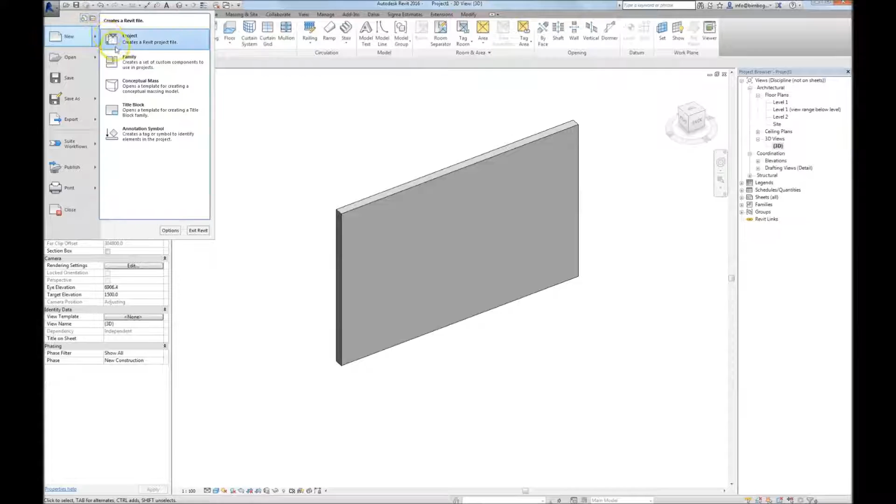I'll start by creating a new family from scratch. Among this list of family template files, I choose metric generic model wall-based, because I would like to have this light box as a wall-based family.

The environment in the project browser is almost like what we know from a project. We have a 3D view, elevation views, and floor plans, exactly like we know it from a building project.

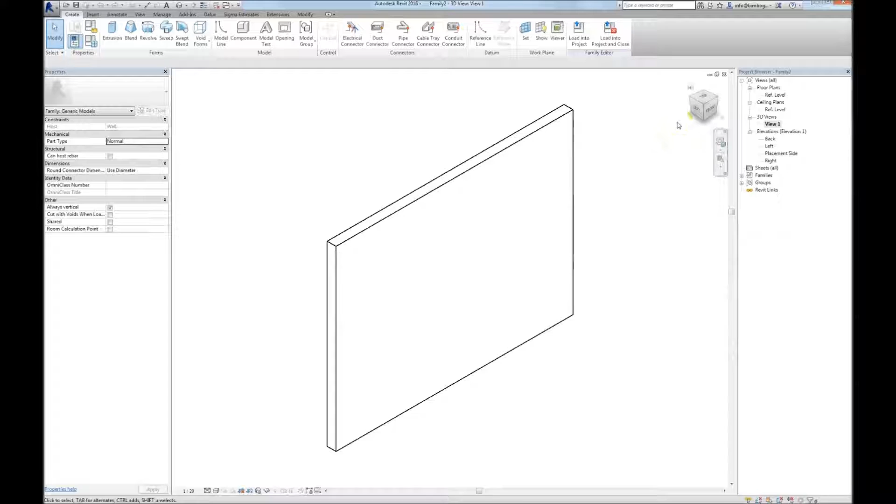So back to the floor plan, note that we have a placement site, and this is where we're going to create the light box. First of all, I'll create some reference planes.

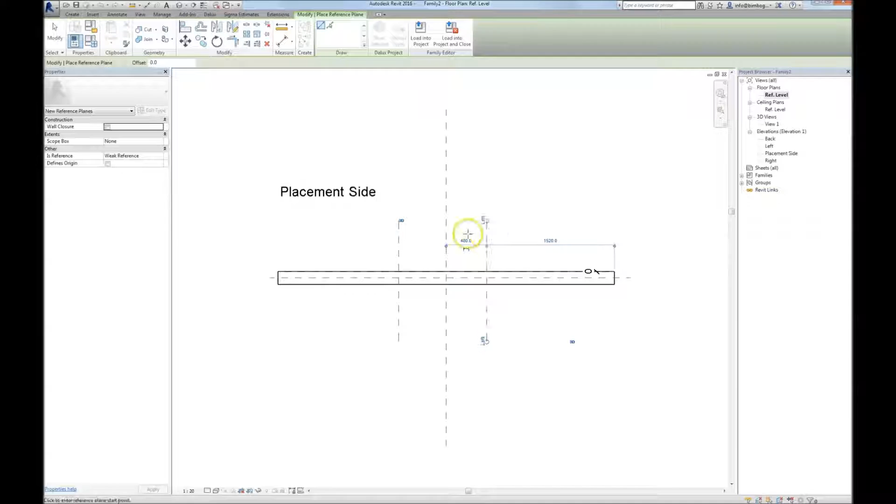I will name them. As you can see, this is the right side if you view this light box from the placement side. Otherwise it would have been the opposite way around, left and right. Then I create another one and name that one front.

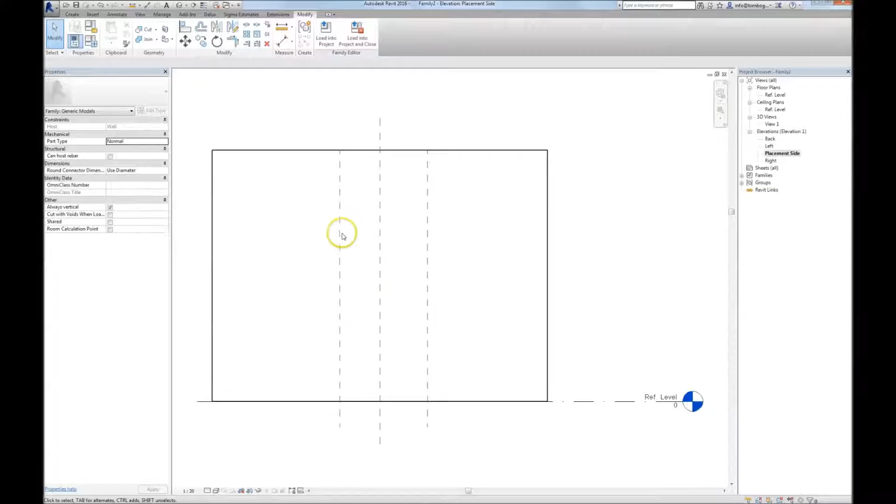Looking at the elevation from the placement side, you'll see that the left and right side is not perfectly aligned around the middle of our wall, around the center of it, but we'll take care of that afterwards.

So we'll create another reference plane, which will be the bottom of our light box.

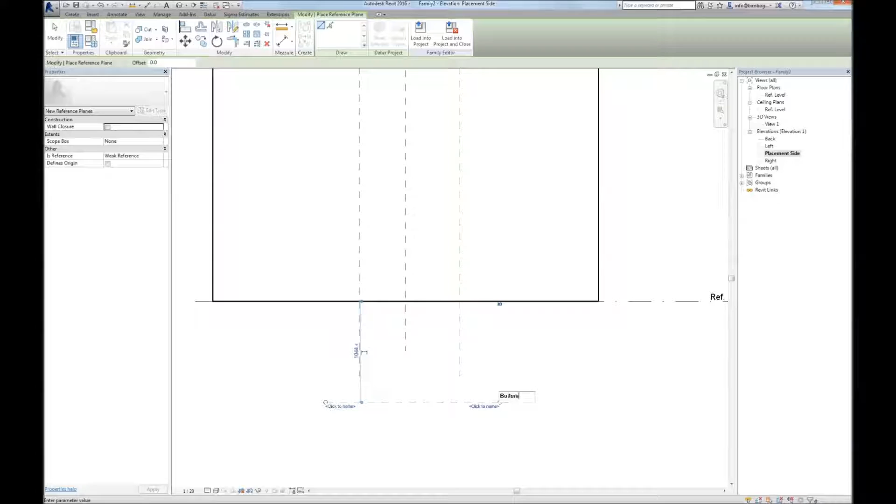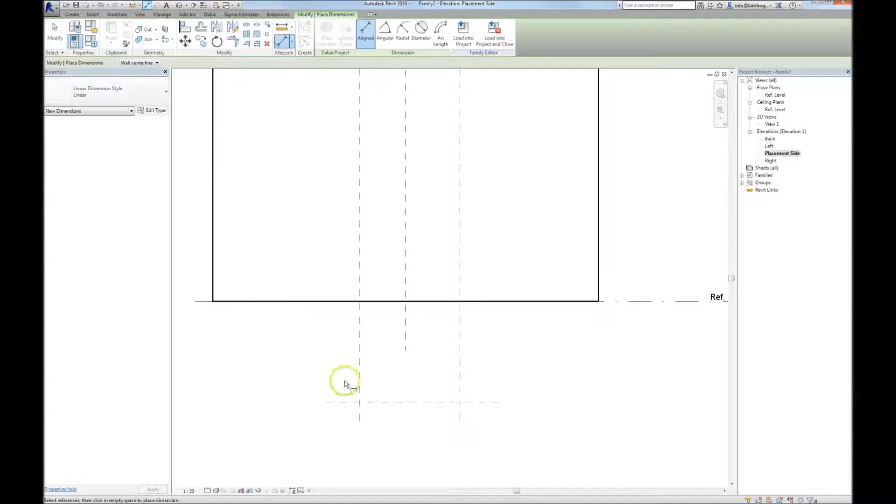So to make sure that when we later on begin to create different sizes and scale these different light boxes, we would like the scale to be done around the center of this light box. So I will add a new dimension and press this equal sign so that there's the same distance from left to right according to the center of the light box.

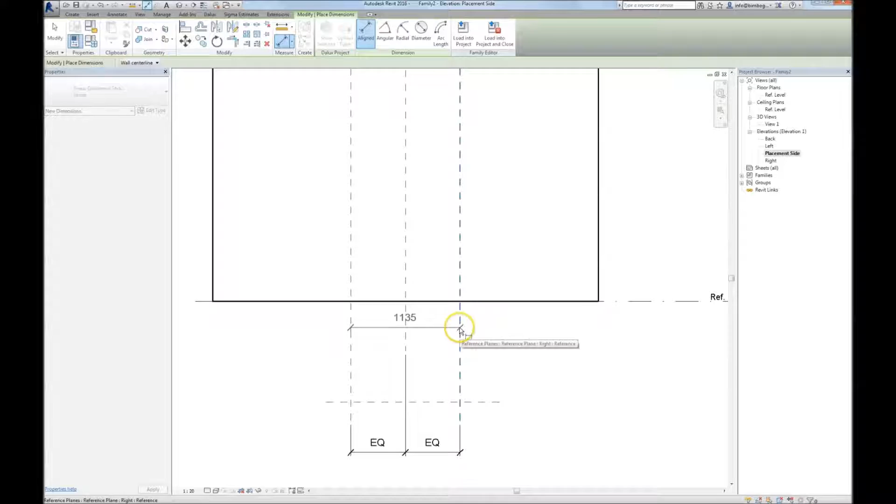I will add another dimension, which is, as far as I remember, the length according to our sketch from Scanplast, and we have a height of the light box as well. Then I will make these two dimensions parametric.

I select one of the dimensions and say add parameter. I type in length, and this is a type parameter. I will come back to this later on, the difference between a type parameter and an instance parameter.

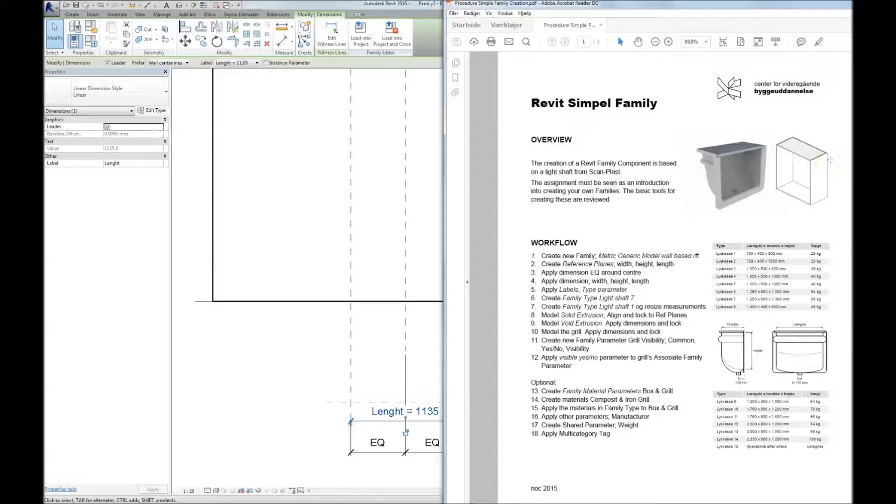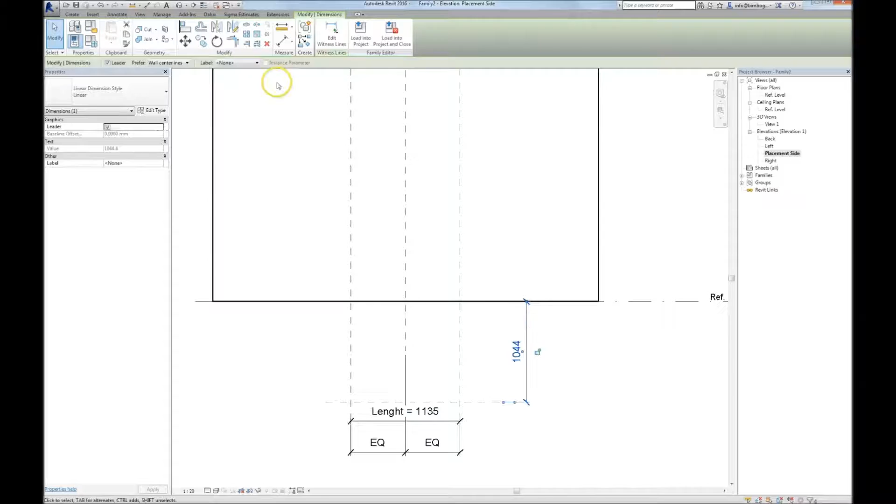Yes, that was the length, and we can create the height also from this elevation view. So we select the dimension and turn this into the height. Again, it's a type parameter.

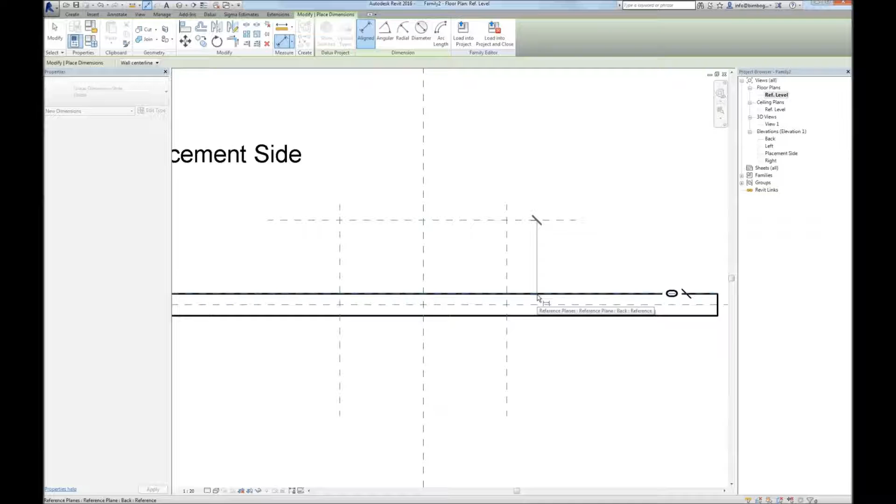Then add the last dimension, and remember that you can press Tab if you would like to select the front of the wall, which is what we want to do now. Select the dimension and add another parameter, which will be the width according to our sketch.

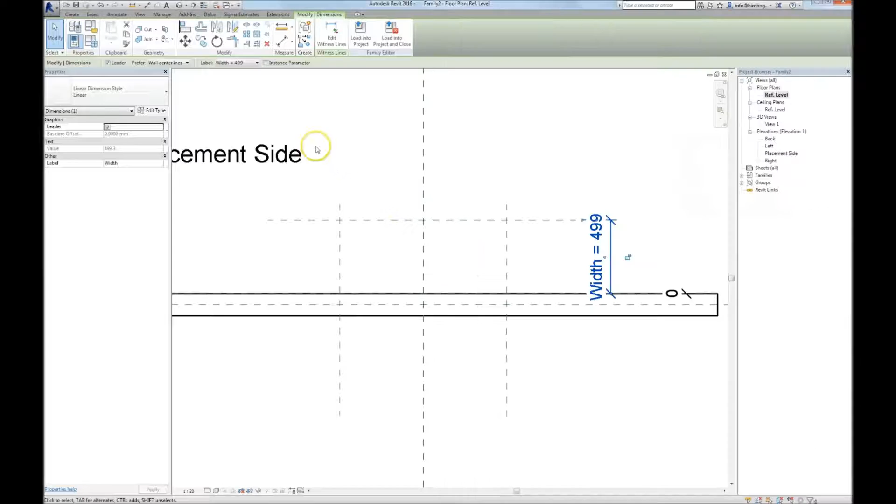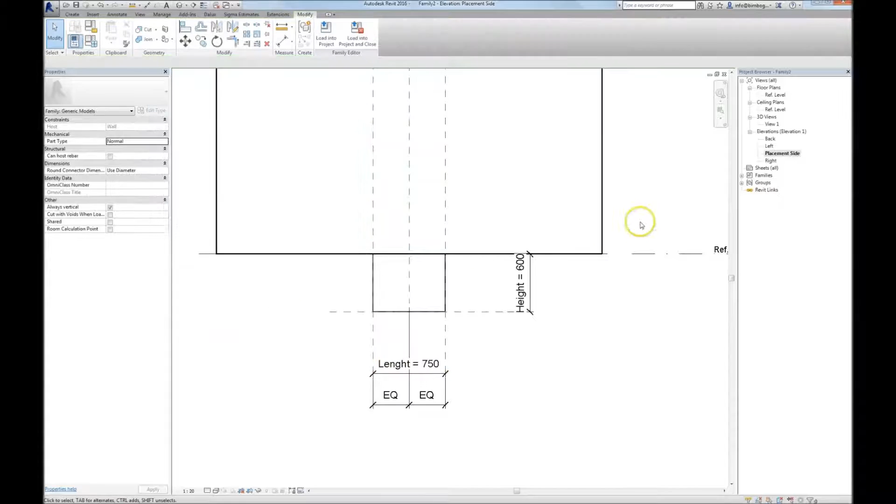Now let's try to see the different sizes of Light shaft 7. This is a good way to control that we have locked everything correctly to the reference planes. So if I change it back to Light shaft 7, we can see that everything works perfectly.

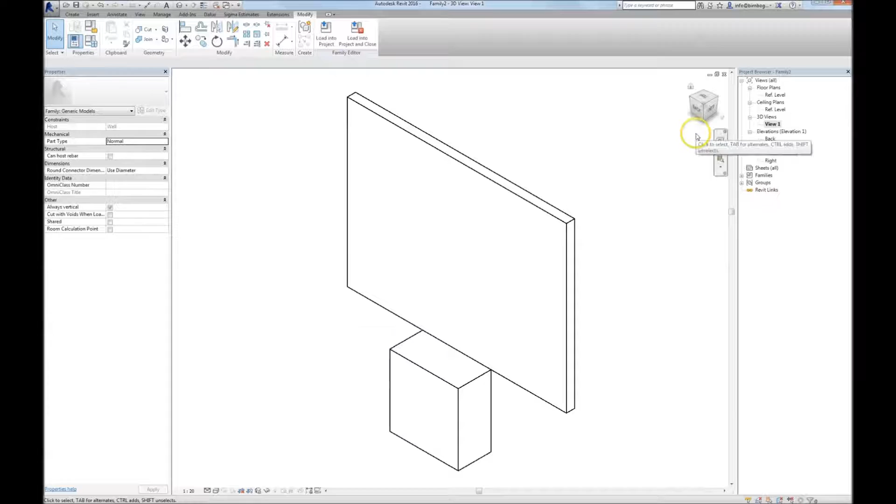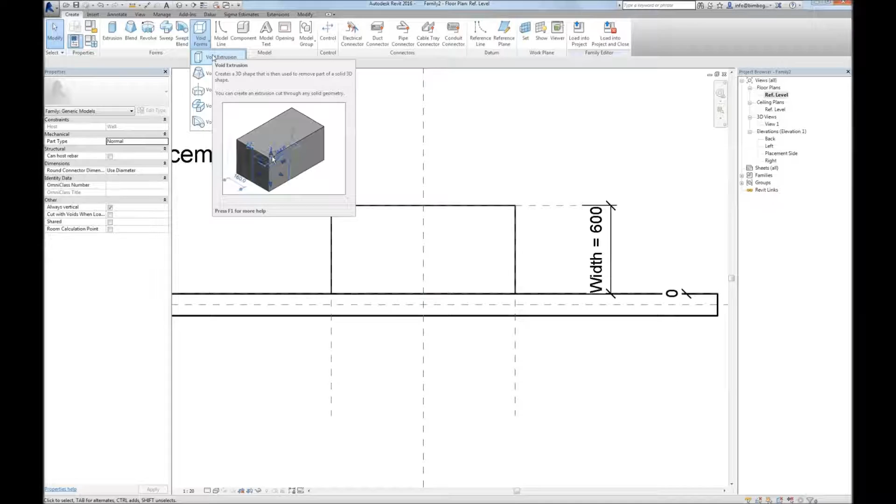Now I will go and hollow out the box, the same way as before, but this time I'm going to create a void geometry. As you can see, we are creating an area as if it was a floor, with some boundaries and a height, which will give us some minus geometry, so to speak. Again I create a rectangle inside the other one.

This time I will only align this one and lock it to the face of the wall, because this time I need to have a thickness.

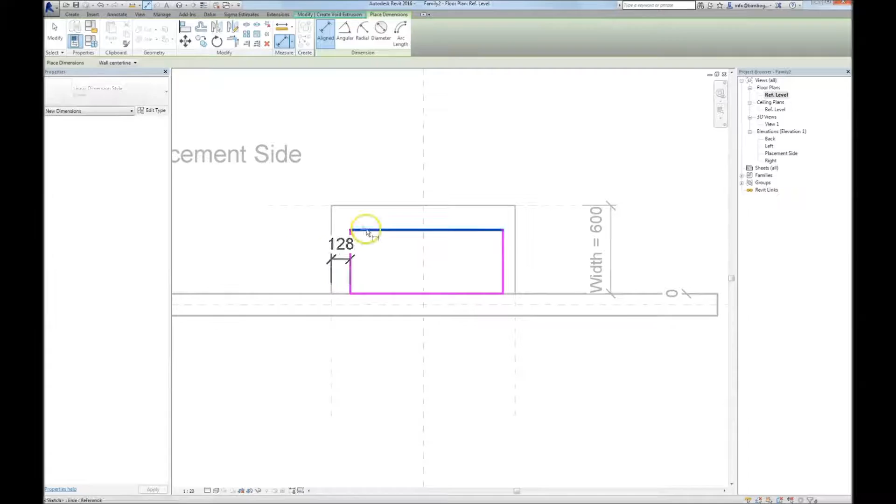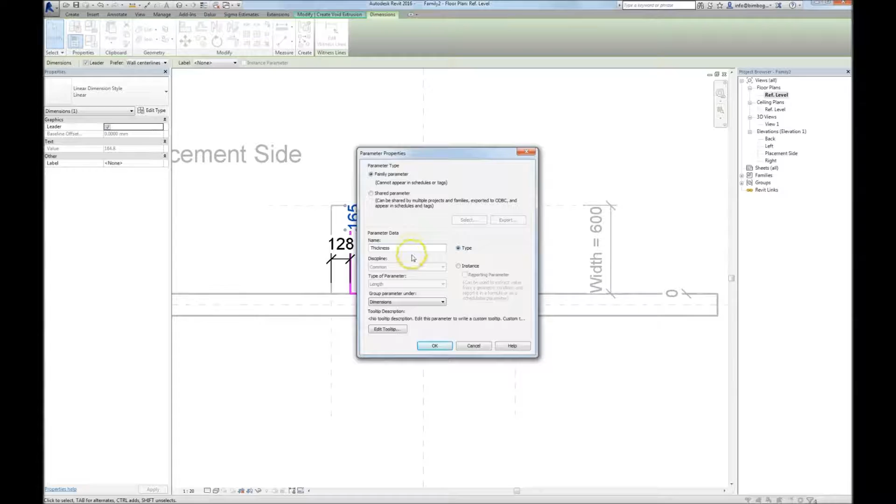So from all three sides I will apply a dimension chain, select one of them, and make them into a label. I will create a new label. Again it's a type parameter, and we call it thickness.

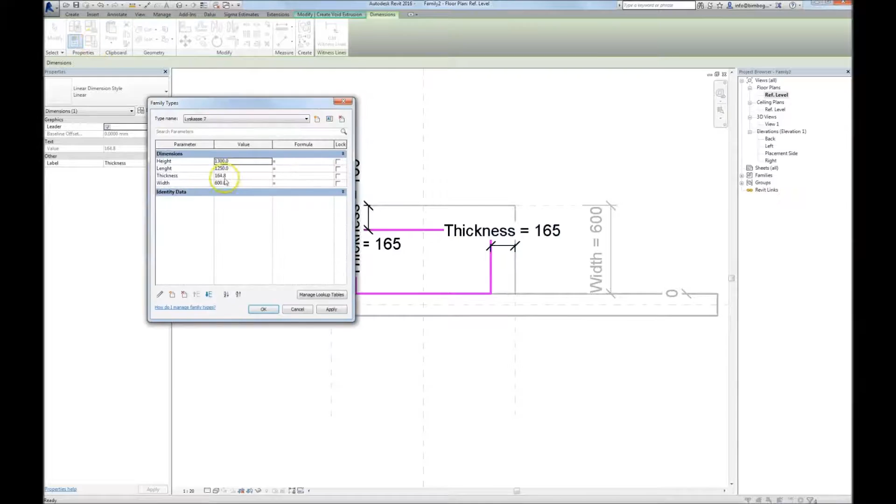And then I select the other one and apply the same label to that one. The thickness is approximately 165, and we will change that to 20.

Since we have locked them together, we can now go and adjust the thickness by only changing one parameter. It's the same as we did before.

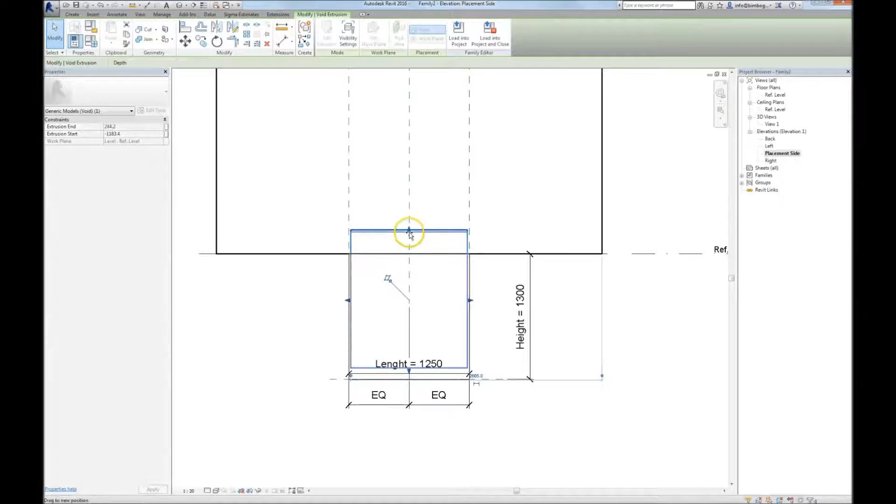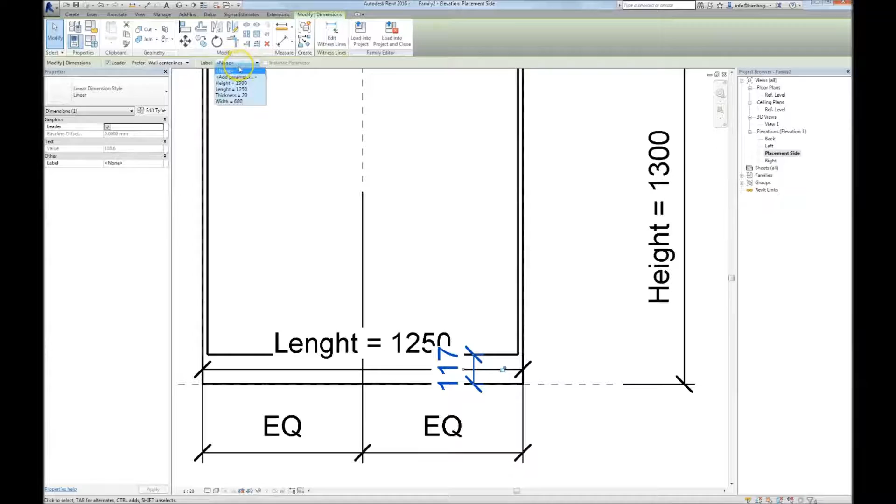Apply the top of the void to the top of the box, or to the level height, to see through our box, our mass. We apply the wireframe, then a new dimension chain, select that one, and apply the same thickness label to it as before.

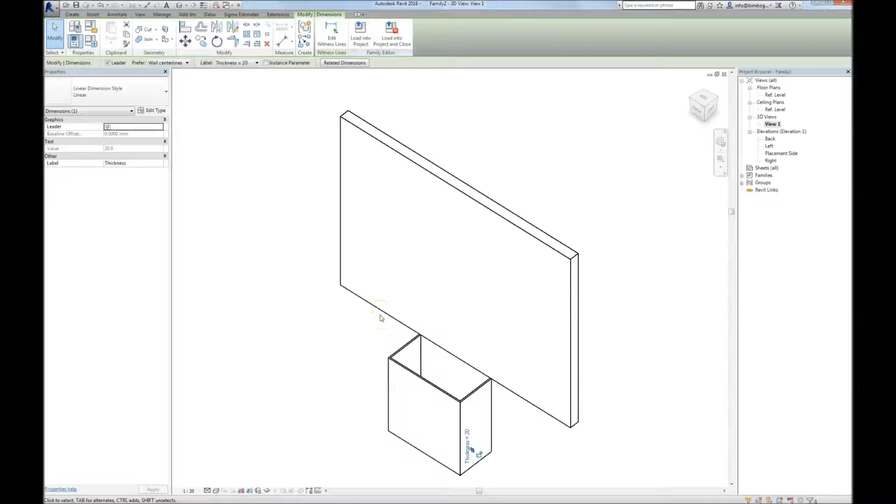So now we have hollowed out our box so that when we apply this to a wall, light will be able to come through this one if we apply a window to the wall. Let's try to check out if we apply Lightbox 1 - how does it look? It looks okay when we change the thickness to 20, as it was on the other one.

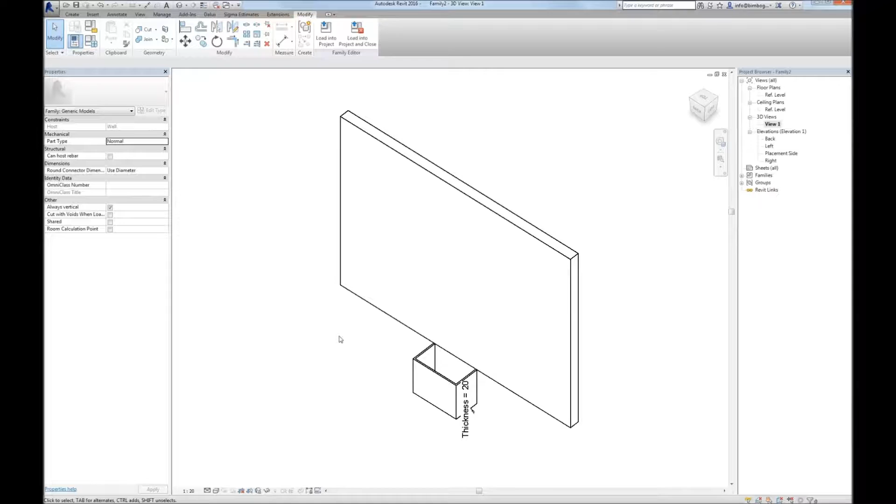So of course now I will go and save this one if you haven't already done that. And then let's try to see how it looks when we create a lid to the lightbox.

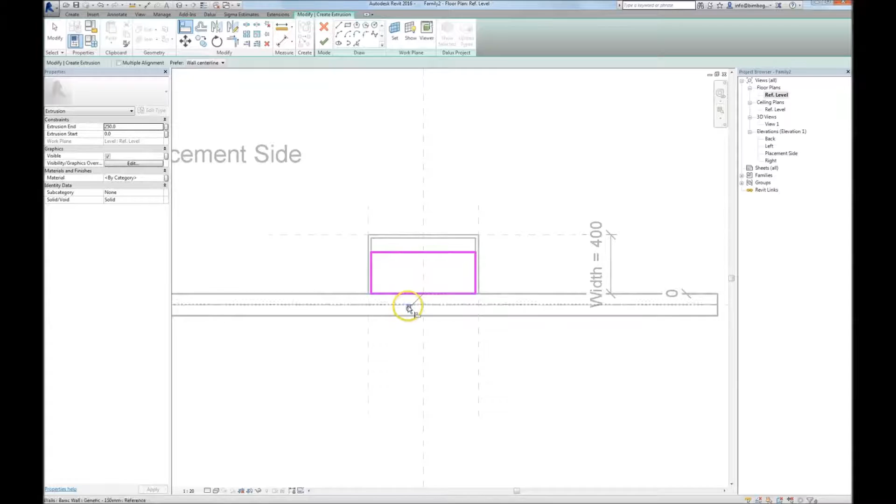So again, I create an area, align the area to the sides, to the inner sides of my box - remember to lock them. And to make this more easy, I will say that the thickness of our lid or our grill top will be the same as the thickness of the lightbox, so it will be 20.

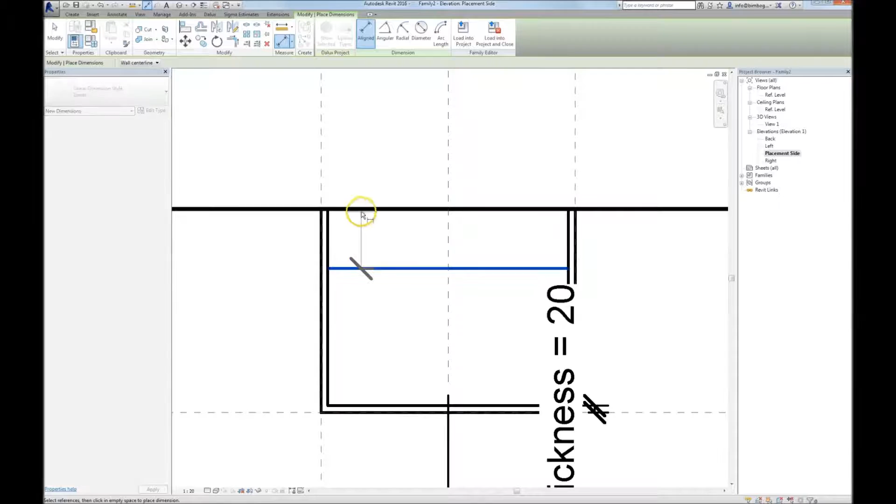So apply a dimension, select the dimension and change it into a label, and it's the thickness, like that.

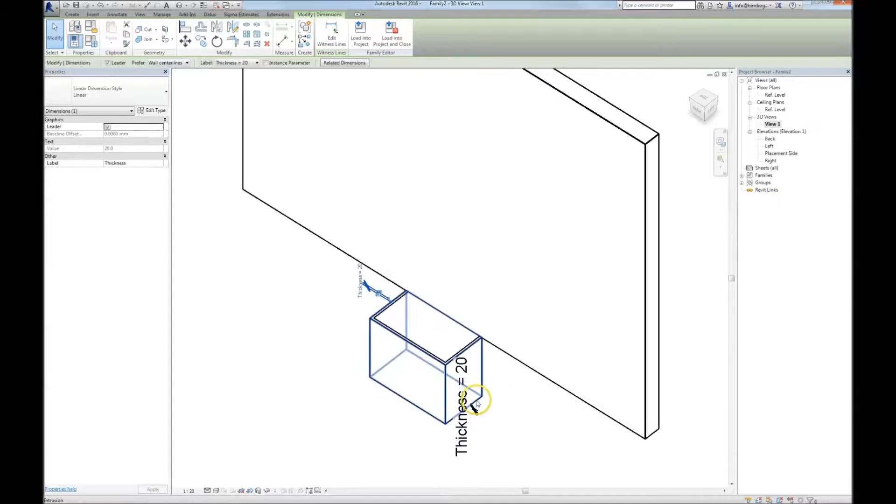Like before, I will go into a 3D view to see if what I have done have I locked it properly together. So I'll go into family types and change the family type to Lightbox 7 and click apply so that I can see that everything is locked perfectly together.

Let's try to add a new parameter, because I would like to have the possibility to turn on and off this lid when I'm using it in my project. So I select my extrusion and click associate family parameter, and we can call this grill visibility, and note that I would like to have the possibility to turn this one on or off individually.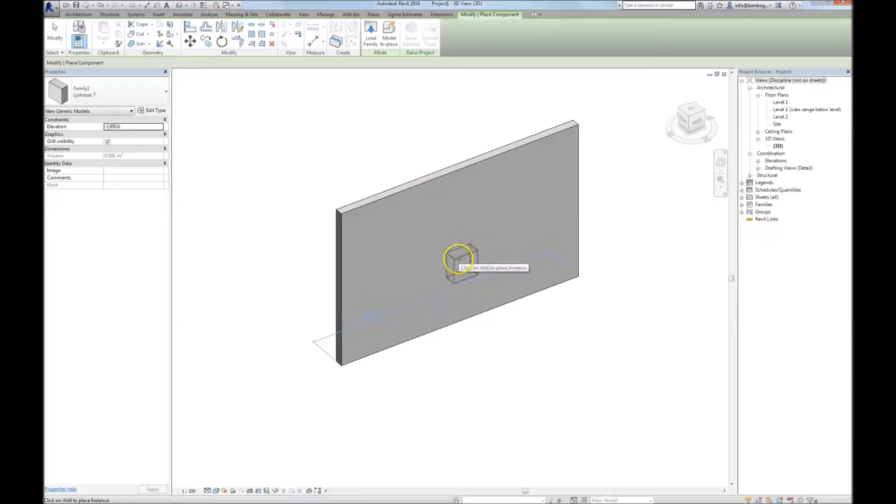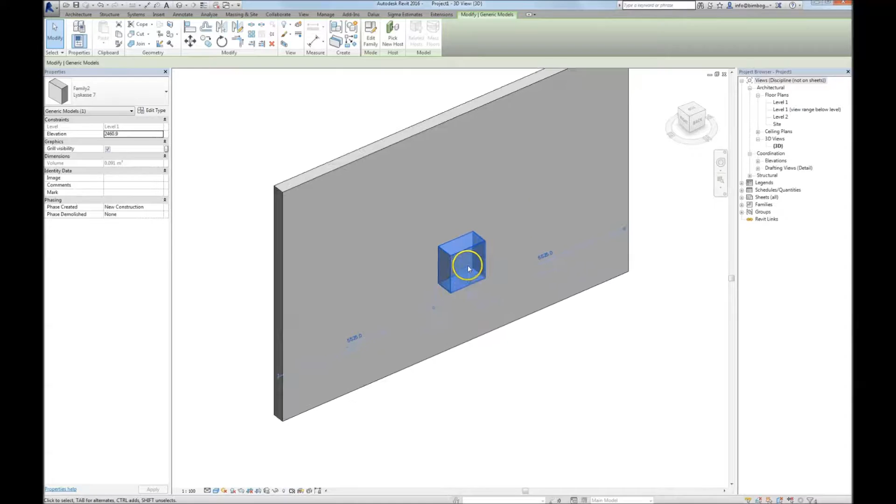And I can place this on a wall, as you can see, because it's wall based. And since I made the dimension of the lightbox as a type parameter, I can go and select the two different types of lightbox, and the sizes will change.

And since I made the parameter grill visibility as an instance parameter, I can go and choose only to make the grill invisible on one of them.

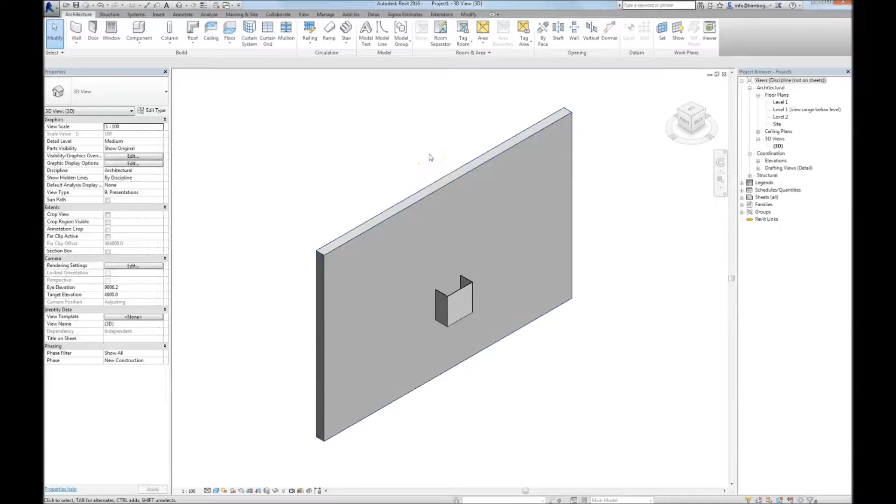Let's try to take a copy of the lightbox so that we have two of them. Now you can see I have applied a small window behind the lightbox. So if I take a copy of this one, I can select one of them and turn the grill visibility off. So that is the difference between the type and the instance parameter.

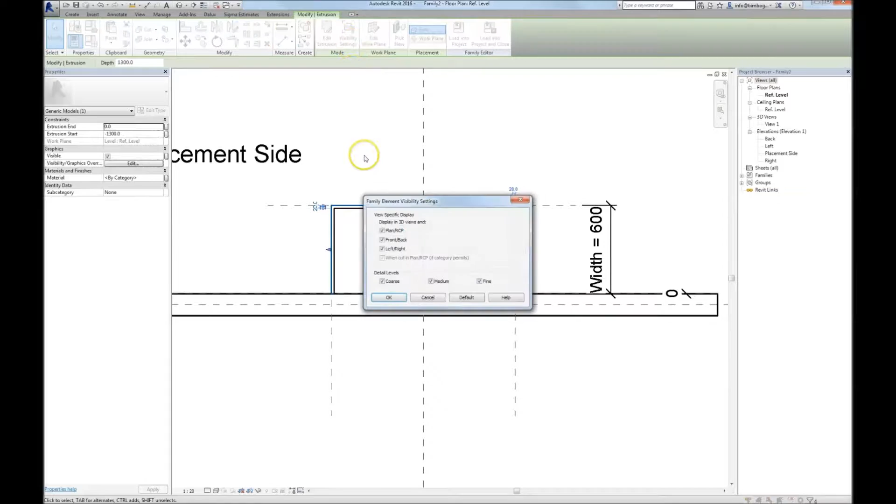Another small thing that I'll try to show you here in the end is that if I go and edit my family - now this is a very boxed lightbox, so to say. If I would like to show a different shape, I can say that my box, my frame of my lightbox, and the lid, the grill, we don't want to see the 3D geometry in our view.

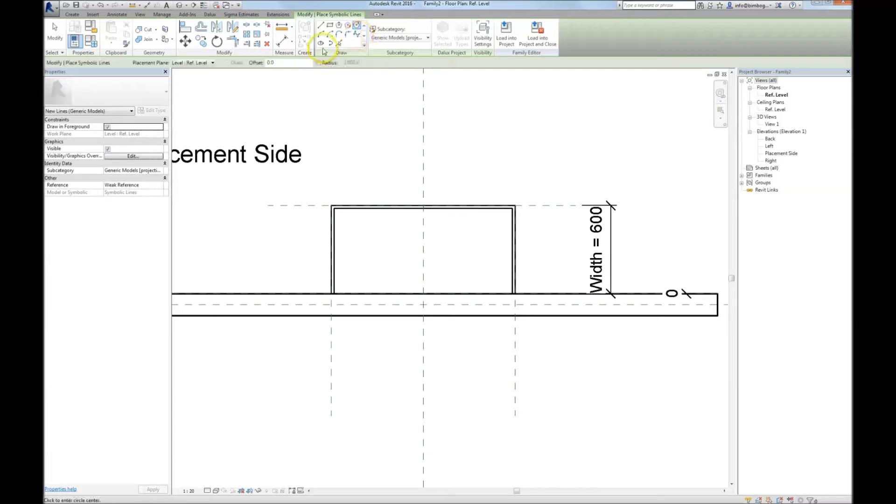Then I can go and say that in Annotate I can add some symbolic lines. Let's say that I would like to have an ellipse shape instead of this boxed shape. So I can create a symbolic line saying that this is what I would like to see, and I don't want to see the rectangular box.

Again, remember to save it before you load them into the project, and remember to overwrite. And then you can see that instead of seeing the 3D geometry, we only see these symbolic lines.

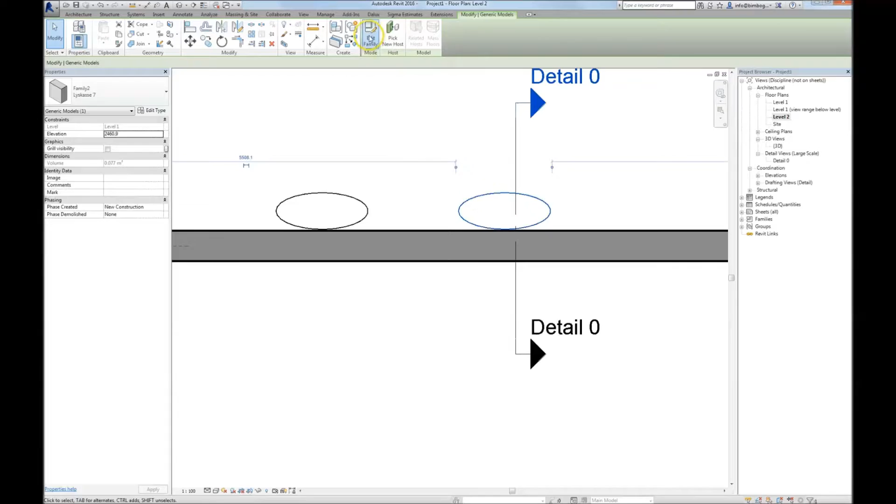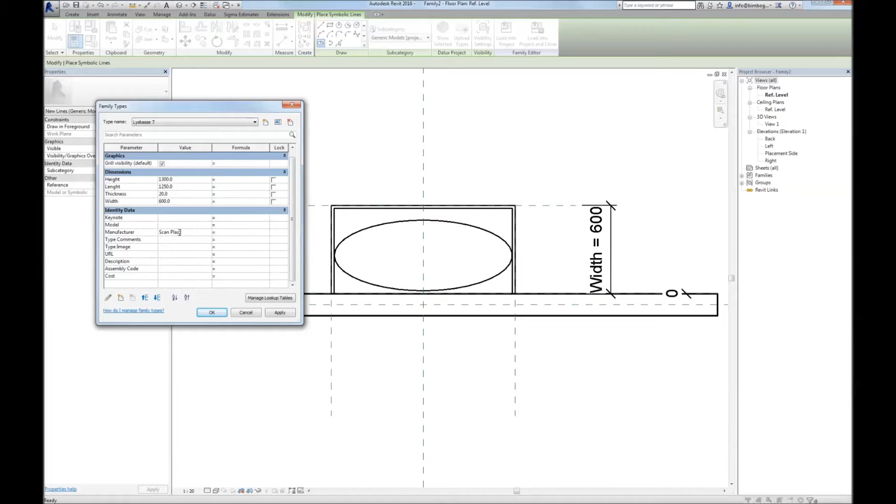One last thing that I would like to show you is that if we add some more information to this family, we can take these informations and show them by applying tags in our project. So now I have applied the manufacturer of this lightbox. In Annotate, I can go and add a tag, a multi-category tag.

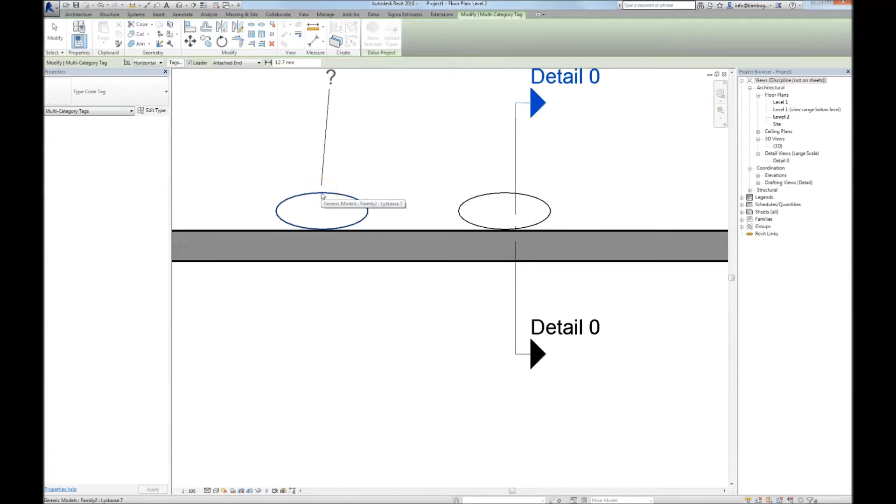Like that. And as you can see, the information is not existing at the moment. So I select the tag and press Edit Family to go and edit the tag.

And the label is set to show the type code and the description. So we go and remove those two parameters.

Instead, we would like to have type name and manufacturer. And if I check break, it will be placed on two different rows, or on top of each other.

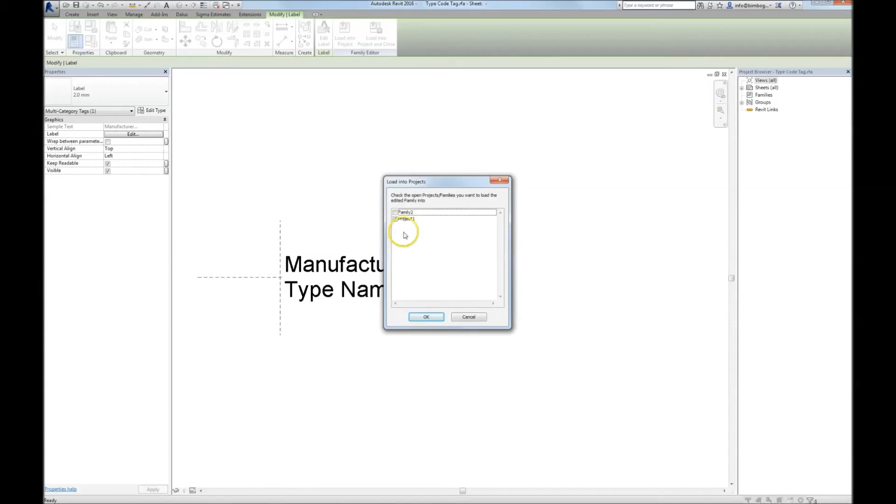So I load into project and override existing family and parameters, and then you can see I can take out the information on the family.